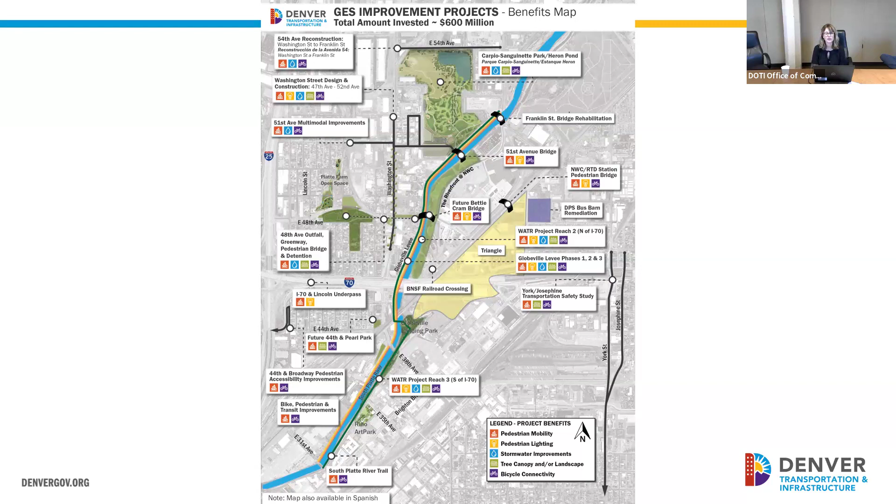So I want to move us to the next slide, which is really kind of an overview of the construction work that's coming. The yellow or orange-ish reddish color are all the projects that should be starting up in 2024.

You'll see that Denver Water is going to be replacing the water line in Washington later this summer. That's supposed to be a 2 to 3 month type of project with most of the work done in the evening, so that's something we'll begin communicating more on soon. The Lincoln Underpass, like I mentioned, some of the NewCo efforts will be underway this year. Franklin Bridge has some improvements coming on the north end of our area, and then 58th Avenue as well.

The next round of projects really are moving into the 2025 timeframe - Washington Street, 51st, the 48th project, the Greenway, and more of the outfall work. All of that moves into 2025. And then the last are some staged more for 2026, like the Bettie Cram Bridge. We're going to talk a little more about the funding of some of those shortly. So we have a lot coming to this area.

So one of the big efforts by OCBE and ourselves will be to begin a very active communication effort on all of these projects, and really trying to pay attention to what the impacts to the community will be.

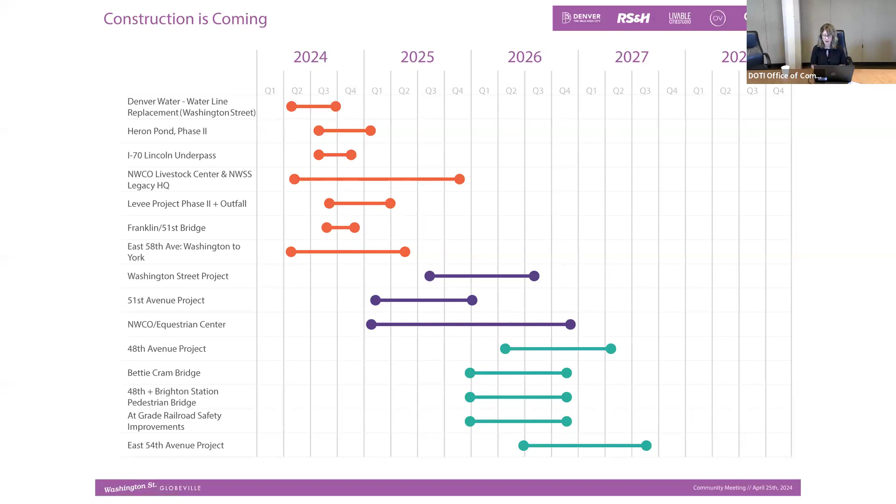If you go to the next slide, this is an example of 44th. I mentioned that sidewalk improvements over the I-25 bridge down to 45th and around, and then stair improvements down to 44th. This is all going in, and my understanding is that the road is opening up again tomorrow, which would be fabulous. It's been closed, and of course those construction impacts have been felt.

So this is a great example of how we're going to have to really get ahead of some of these things, pay attention, and support our local properties as we move into construction over the next years. I'm happy to take any particular questions about any of these projects.

Any questions for folks?

I have a question, sorry, it took me a while to find the right button. This is Catherine White with the GES Gazette neighborhood newspaper. What kinds of tools will be available from the city for businesses to mitigate the construction impacts?

Yeah, that's a great question, and that is something that is at the forefront. Hold on one second.

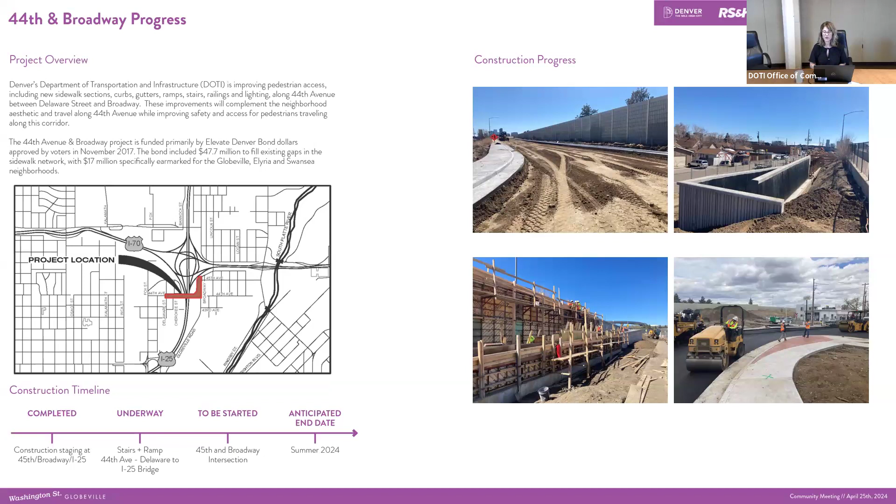Anyone else in particular about this topic? All right, okay, so I think I'll move us along, and NuCo has an update for us as well.

Hello everyone, I am Mike Bouchard, I am the Executive Director of the Mayor's Office of the National Western Center. And we are - oh, that helps, sorry - could you go to the next slide please?

Yes, we are building out phases 1 and 2 of the National Western Center campus, as shown here. And so I wanted to take a little bit of time tonight to give you all an update on the recent grant award that the city received from the U.S.

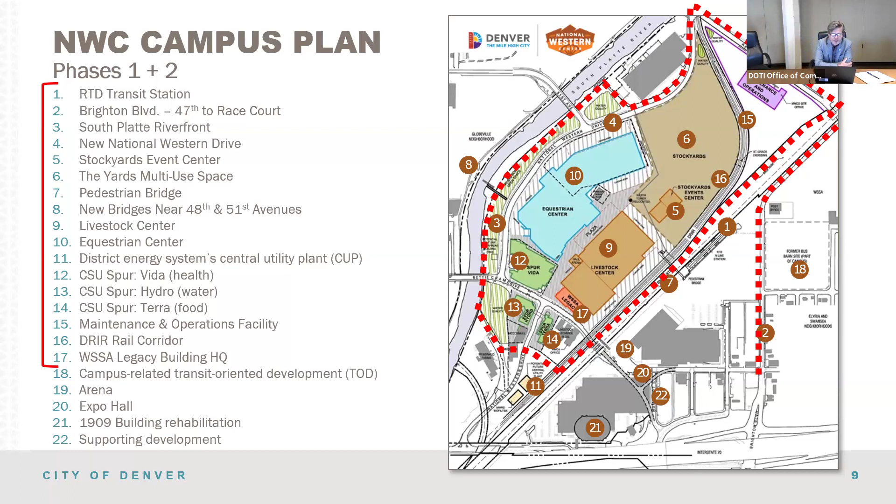This relates to the Department of Transportation and how it connects to our campus, and the projects that are part of phases 1 and 2, and what this funding means for the timeline to get some of these projects done sooner than we otherwise would have been able to.

This all started last fall when the grant became available. We had a very short timeline to put our grant proposal together, so I wanted to give a little background on what the grant is, where it comes from, and what the dollars can and can't be used for.

This is a U.S. Department of Transportation grant program called Reconnecting Communities and Neighborhoods. It's a federal grant award, and 132 communities were awarded in this most recent round, representing over $3 billion of investment from the Infrastructure Investment and Jobs Act, or the IIJA. This is one of the signature pieces of legislation from this administration, and these dollars represent getting infrastructure investment dollars to local communities to get work done on the ground.

Given that this is the Department of Transportation, these dollars are fairly specific on what they can be used for. They are to plan or construct transportation projects that do one of the following four things: improve access to daily needs such as jobs, education, healthcare, food, and recreation; foster equitable development and restoration; reconnect communities by removing, retrofitting, or mitigating highways or other transportation facilities that create barriers to community connectivity, mobility, access, or economic development; and finally, prioritize disadvantaged communities.

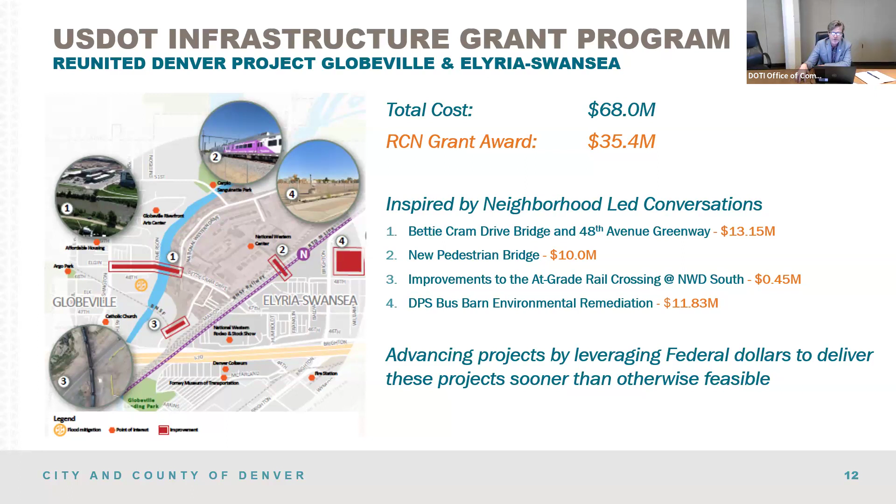This grant allows us to do all 4 of these projects sooner and to complete the campus vision that was set through planning documents over a decade ago. This allows us to finally fully fund and build out these important connections. Next slide.

A little bit about the timeline of how this all came together. Back in August, we started looking at what the opportunities were for this grant citywide and quickly identified these 4 projects as what we felt was a very competitive grant application.

So in September, we began grant writing and grant advocacy. It's quite a lot of work to put together a proposal for a grant like this, and there was quite a lot of effort put into that in September.

We did issue a letter to the CAC, the Community Advisory Committee that the National Western Center Authority hosts, informing them that we were pursuing this grant. But given the timeline and the short turnaround to prepare the proposal, we didn't have a lot of time to do more robust community engagement and information about what this grant was and what it wasn't.

So from October to February, the U.S. Department of Transportation was reviewing this grant. We had our congressional delegation advocating for us - Diana DeGette, John Hickenlooper, and Michael Bennet were all in Washington advocating with the Department of Transportation to award us this grant.

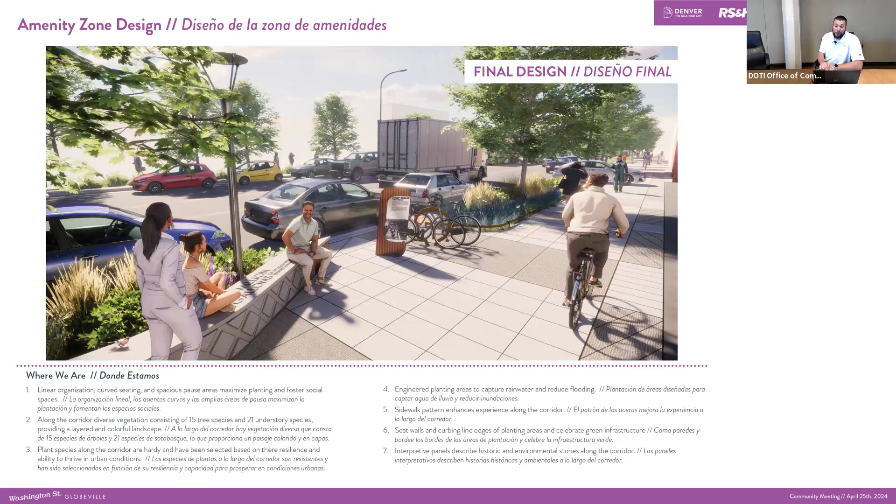This is the goal. So you see parking on this exhibit, but there isn't going to be parking everywhere on the corridor. We'll go through a slide that looks through some of the individual blocks here in a minute. But this is really a take on what we're looking at here, both etched patterns in the sidewalk. I mean, really trying to make this beautiful, an amazing place that we want to be, and we want to walk and socialize and be present in.

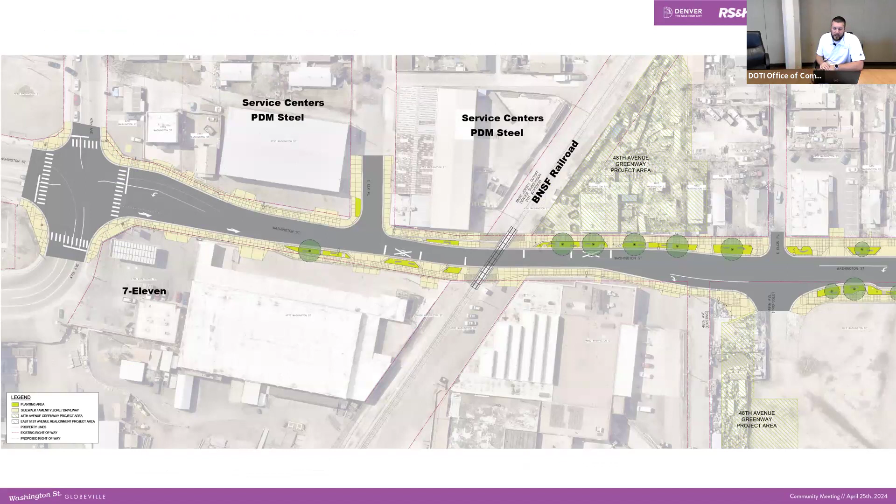So these next few slides will show what we call a roll plot. This is really just the exhibit, the picture of what we're building in the area. Now this picture is online, so you're welcome to go to our website, and you can look at this in much more detail. You can zoom in, it's a pretty high resolution graphic, so you can scroll in and see a lot of detail.

I'll talk through this briefly. This is the stretch from around 49th to 50th. You can see there's a few things in this graph. The general yellow, that's sidewalk - this is all the new sidewalk or driveways that the project's going to be building as part of the process. So everything along this corridor, 47th to 52nd, can get brand new sidewalk. Most of it's 10-foot, some of it is 12-foot. That does not include the space where the amenity zone is, which is roughly 6 to 8 feet, depending on where we're at on the corridor.

We're looking at plugging in a ton of new trees, shrubs, bushes, and any planters we can fit. These big green circles are trees on the exhibit. If it shows a yellow hatched off area, that's what's going to have some type of green infrastructure. We'll be collecting groundwater, filtrating that water, and putting it back into our system after the plants we've put in there are collecting and cleaning it naturally.

One of the things we've heard a lot from the feedback, other than wanting shade and trees, is care for both the environment and what that looks like. A lot of our planters specifically target this environmental focus that we really wanted to have along the corridor.

You're welcome to pull up this exhibit in detail, but there's going to be new driveways along the corridor, sidewalks everywhere. A lot of the intersections are all going to have bulb outs where we could fit them. We still have to accommodate the truck use on this corridor, so there's a balance between accommodating trucks making turns while trying to put these crossings in places that are very visible, easy to see, and safe to cross. We want this to be a place you want to be. That's another reason for the amenity zone, creating separation from the walking path or biking path from where the vehicles are.

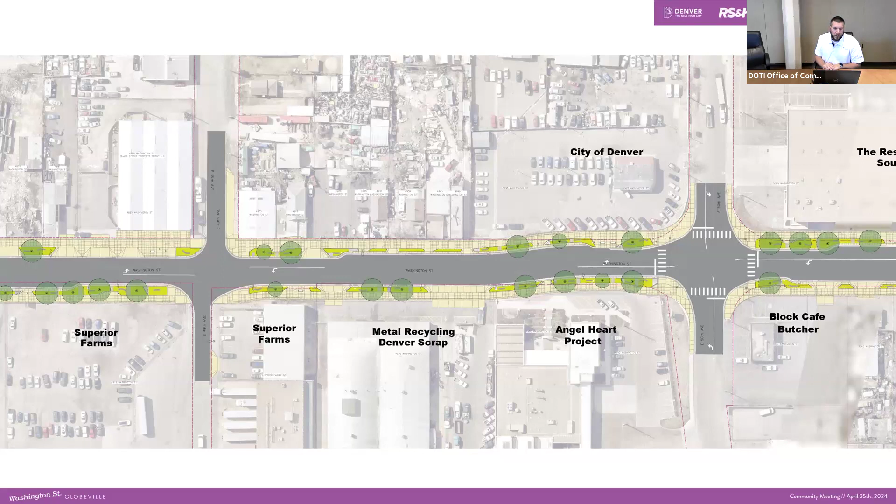Let's go to the next slide. This is here on the north end, so we'll go all the way to 52nd. We can talk through 51st if we have questions on that as well.

The 51st intersection is grayed out because it's a separate project, similar to how we talked about the 40th Greenway or the Reconnecting Communities grant, where there was federal funding attached with the other project. There's federal funding attached to Washington Street, so the 51st intersection is being done by a different project, a different effort, which is why it's grayed out on this exhibit. It's specific to Washington Street. We are looking at realigning the intersection, hopefully starting towards the beginning of next year, right after the stock show. You can see there's Washington Street, and we're making sure we're keeping this planting wherever we have space and keeping this access open.

Now I've talked through the amenity zone and the overall exhibit, I am going to pause here. If there are any thoughts or questions on Washington Street, I'll take some on 51st if you have them, but on Washington Street, if there's anything, I'm happy to chime in.

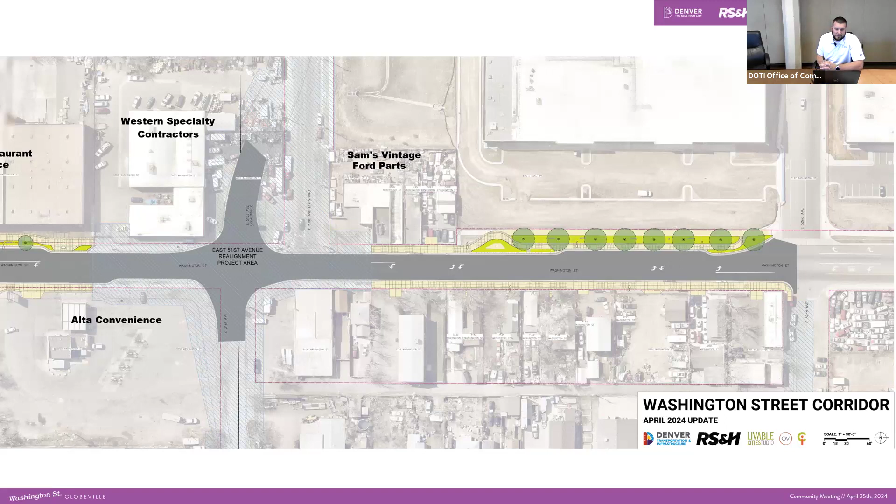Excellent. Next slide.

These are some of our signs that we're looking at. These are signs that are going to be on our website. You're welcome to look on the Washington Street specific or the Washington Program of Projects website we've linked you to. If you have questions, feel free to email Chris. These are ideas, not necessarily exactly what's going in there, things we can highlight and talk about. One of the things we're asking anybody here in person was to put a sticky note on this sign and tell us what you think, what could be different or what you'd like to add. Same ask of anyone chiming in virtually: send an email, let us know what you think could be different, added more, or had less of. We're open to feedback on exactly what these signs entail. These are examples, so you're welcome to go to our website, pull them up, take a look, and let us know any feedback you might have. We are still open and welcome to any feedback.

And then I'll let Beth speak into historic interpretation a little bit.

This is the last thing for this evening. I want to draw your attention to the fact that of all these kinds of signs we're looking at on Washington, we have the potential to put out some historic signage, and the map you see on the right shows all the potential locations. In the end we probably cannot have that many, but these are the ideas.

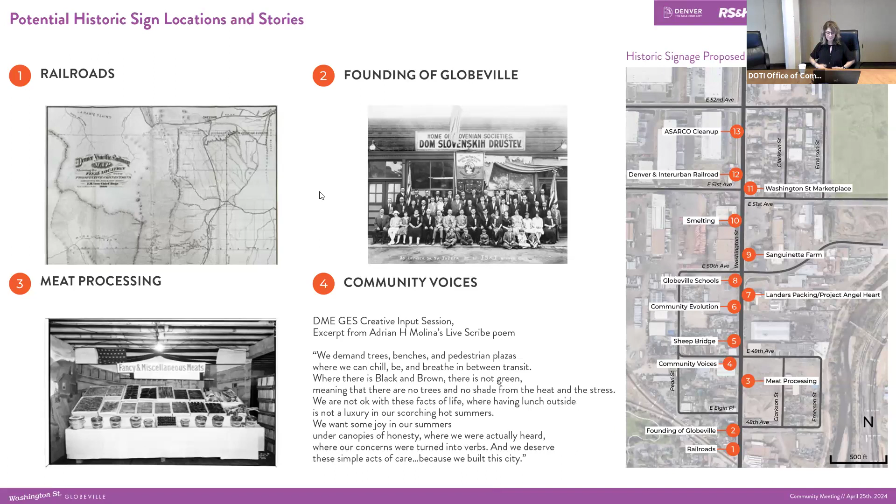So if you go to the next slide, there's a few others. The wording isn't included on this slide, but it will be in the PDF. We've got the sheep bridge and the sheep meat packing industry, which was a big historical aspect of Washington Street, particularly in Globeville. The evolution of the community and the immigrants who came to this neighborhood over the years. Sanguinette Farm, located up at the north end—we've highlighted some of these in the text. Next slide.

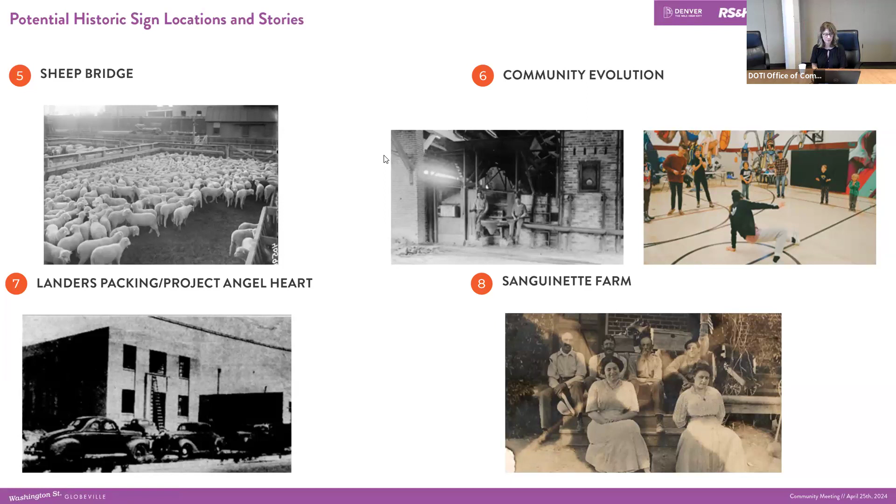And then the Globeville School, the smelting industry, which was a very big part of this neighborhood, the interurban railroad and some of our transportation history, and then of course the marketplace and our other commercial uses along the corridor.

So take a look when you can at the stories that exist now, and let us know if there are any others that would be of interest. We are working with Historic Denver to validate and confirm all the information that would ever go on a sign, but we would love to hear your thoughts on these things. So with that, I'm probably going to let Chris close out our meeting, but are there any questions about the history or the environmental signage concepts we'll be considering as we go forward in construction?